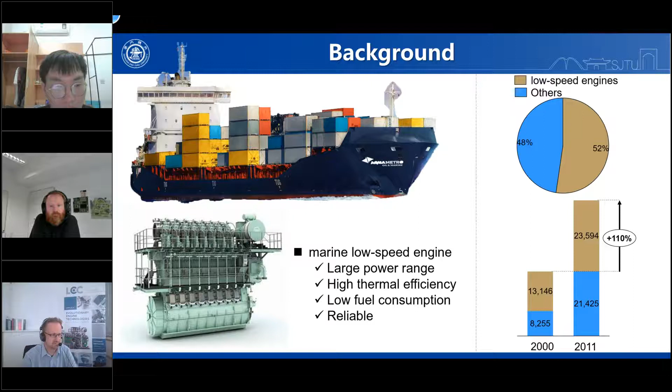As we all know, the two-stroke engine operation cycle consists of 4 periods, and among them, the scavenge process of the marine low-speed engine covers the entire stage from the opening of the scavenge port to the closing of the exhaust valve. During each stroke, the scavenge process not only cleans the combustion exhaust gas in the cylinder, but also provides fresh air for the combustion in the next cycle.

Simultaneously, the scavenge process must provide a certain initial vortex for the intake air. In the fuel injection stage, the appropriate strength of the cylinder vortex can promote uniform mixing of fresh air and fuel, and subsequently achieve efficient combustion of the mixture.

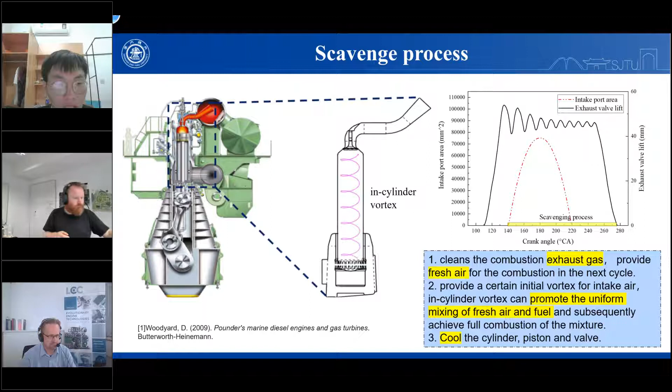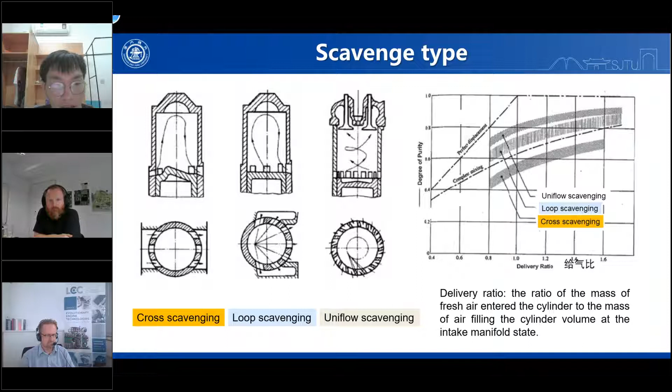Historically, there are 3 kinds of scavenge type: cross scavenge, loop scavenge, and uniflow scavenge. The biggest difference between the 3 types is the arrangement of the scavenge port and exhaust valve. The figure on the right shows a comparison of the scavenge efficiency for the 3 types of scavenge methods. As we can see, uniflow scavenge has the highest scavenge efficiency at all delivery ratios.

Besides, to meet the requirements of ship owners for low fuel consumption and IMO's regulation on greenhouse gas emissions of newly built ships, the ultra-long stroke low-speed engine has become a trend. With an ultra-long stroke, the combustion speed of low-quality fuel oil is low, and an ultra-long stroke cylinder can prolong the expansion process, improve the combustion process, and reduce the fuel consumption rate. The ultra-long stroke diesel engine can further create fuel savings of 3.5 to 7% based on the original fuel consumption.

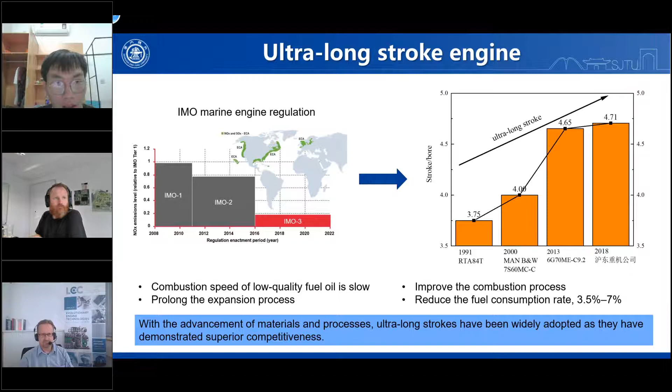In summary, the developed trend of 2-stroke engines is long stroke or ultra-long stroke as future developed trends, and uniflow scavenge will gradually replace cross scavenge and loop scavenge. The low speed engine will set the scavenge port angle to make the cylinder have a strong organized vortex flow and stabilize the macroflow of the gas.

But the cost of experiments for low-speed 2-stroke engines is daunting, and at the developing stage, extensive one-dimensional performance simulation is adopted to reduce the cost and accelerate development, especially in the area of digital manufacturing.

Furthermore, in the conceptual design stage of the engine, CFD calculation could not even be carried out due to the lack of specific geometry data.

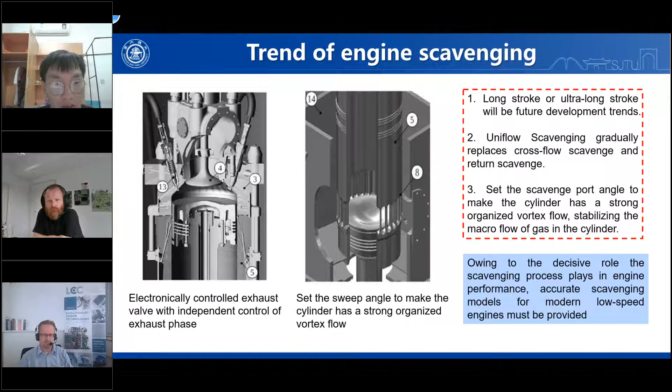Owing to the decisive role the scavenge process plays in engine performance, an accurate scavenge model for modern low-speed engines must be provided. There are 2 types of scavenge models for low-speed engines: the single-zone model and multi-zone model. There are also 3 types of single-zone model: the complete mixing model, the complete replacing model...

The complete replacing model assumes that the exhaust gas is completely replaced by fresh air, meaning the gas composition discharged from the exhaust valve is totally exhaust gas. The complete mixing model assumes that the exhaust gas is completely mixed with the fresh air. However, the scavenge efficiency calculated by both models has an error of 7% to 9% compared with actual results.

The heavy exhaust model assumes that the gas composition discharged from the exhaust valve is a mixing of exhaust gas and fresh air, so a coefficient is added to the equation.

In 1971, Wallace developed a new two-zone model. He divided the cylinder model into 2 zones: the mixed zone and the fresh air zone.

In 1991, Benson developed a scavenge model for cross scavenge. He divided the cylinder volume into 3 zones, adding a short circuit zone to Wallace's model. The short circuit zone means fresh air directly discharged from the exhaust valve once entering the cylinder, without mixing with the exhaust gas or pushing out residual exhaust gas.

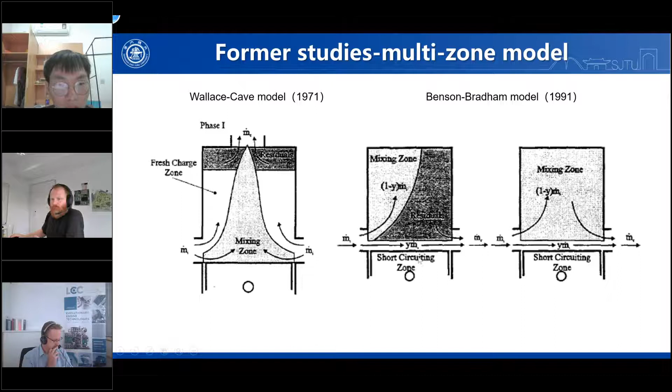But the figure shows that the 5 scavenge models compared with real data are not suitable for the modern engine scavenge process. As we can see, none of the models are suitable for ultra long stroke engines.

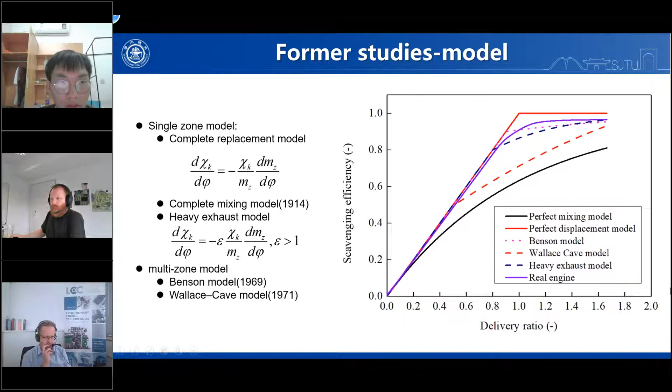So our goal is first to give a detailed discussion on scavenge performance, since existing models are based on traditional cylinder configurations, and no scavenge model is suitable for ultra long stroke engines. We want to propose a scavenge model suitable for modern low speed, long stroke, well-port uniflow scavenge engines.

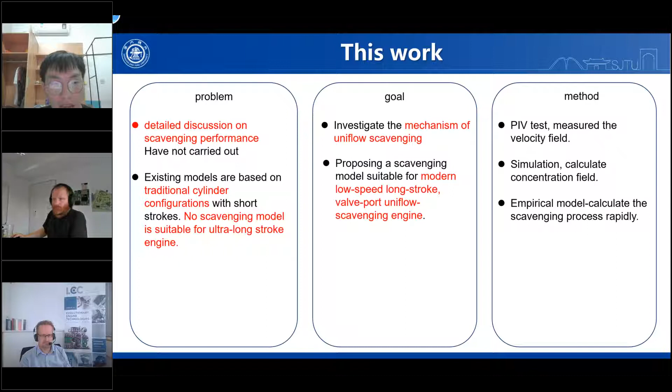We will first give an experimental method to investigate the velocity distribution at different cross sections. Second, a numerical method was used to elucidate the flow mechanism of the scavenge process, and the numerical model was validated by the experiment results. Thirdly, key assumptions are refined from the flow mechanism, based on which an empirical scavenge model is built.

Here we come to the experiment part. Our experiment is performed on this diesel engine, whose characteristics are listed in this table.

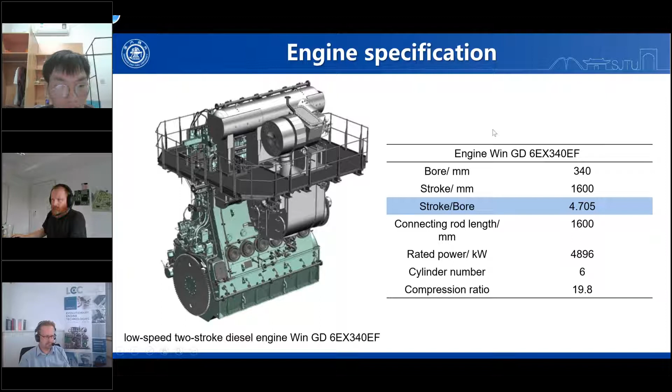The original engine cylinder size was selected for the test bench measurement section to ensure the degree of restoration of the original engine in the test. The scavenge pressure between the inlet and outlet was maintained at 3 kPa, which is the same as in the actual situation.

Vortices are composed of a smaller vortex core and an annular high-speed area. The velocity magnitude at the vortex core was lower than that in the annular area. Comparison of different axial sections shows that as the scavenge airflow moves downstream, the vortex energy began to gradually attenuate.

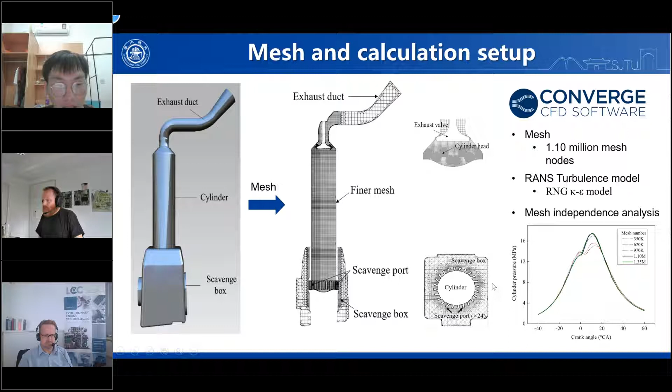The simulation mesh has been verified to be independent, as this figure shows, and the total number of mesh elements at bottom dead center is approximately 1.1 million.

To further verify the simulation model, the overall degree of scavenge non-uniformity calculated by test data and the simulation was compared.

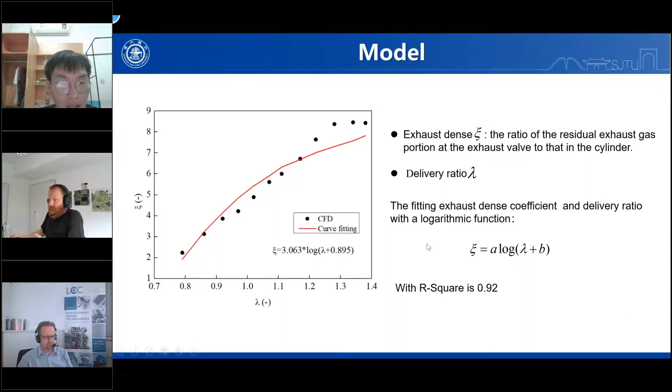As we mentioned, we divide the scavenge process into 3 periods. During the perfect displacement period, the gas composition discharged from the exhaust valve is total exhaust gas. So the scavenge efficiency is equal to the delivery ratio.

In the mixing scavenge period, the gas composition discharged from the exhaust valve is a mixing of the exhaust gas and fresh air. The exhaust density is calculated by this empirical relationship with the delivery ratio. And in the short circuiting process, the gas composition does not change anymore.

So we get this empirical model for the scavenge process.

Next we verify this model with 4 loads: they are 25%, 50%, 75%, and 100%. The discrepancy was maintained within 3%, and the maximum discrepancy occurs for the case with 25% load.

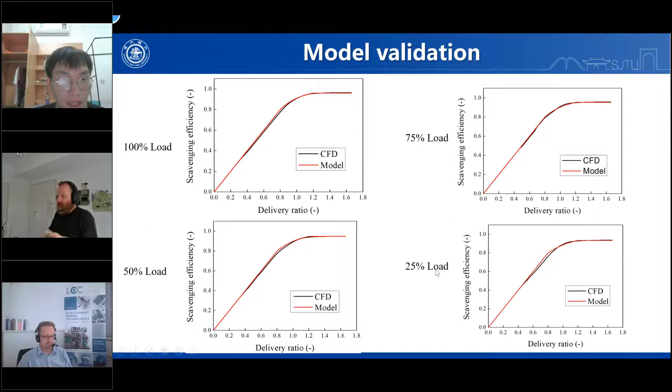And we also verify the model on engine performance.

When the Benson model is adopted, the discrepancy in engine power is up to 12%, which is intolerable. Meanwhile, the discrepancy of BSFC and indicated power, thermal efficiency and NOx had the same bad simulation effects.

In addition, the discrepancy will not be much better with the perfect mixing and perfect displacement and dense exhaust model.

However, with the model developed herein, the discrepancy in the engine power, BSFC, and the indicated thermal efficiency nearly disappeared, and the discrepancy of NOx stayed within an acceptable range.

In conclusion, the uniflow scavenge model of a low-speed engine is crucial for the calculation of low-speed diesel engine performance. However, the cylinder configuration of low-speed engines has profoundly changed the flow characteristics. Thus, the existing scavenge model cannot meet the requirement of high simulation accuracy.

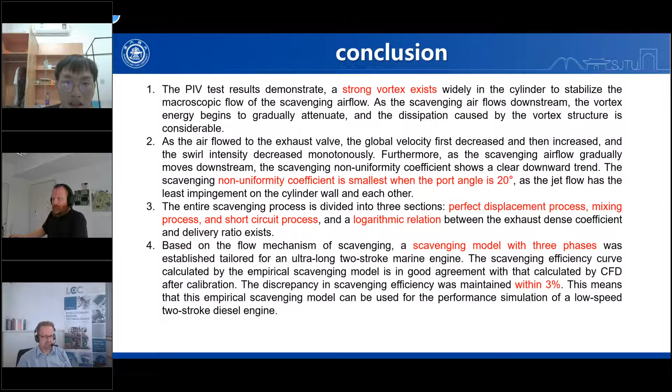We developed a scavenge model with 3 phases, and the discrepancy in scavenge efficiency was maintained within 3%. That's all. Thank you.

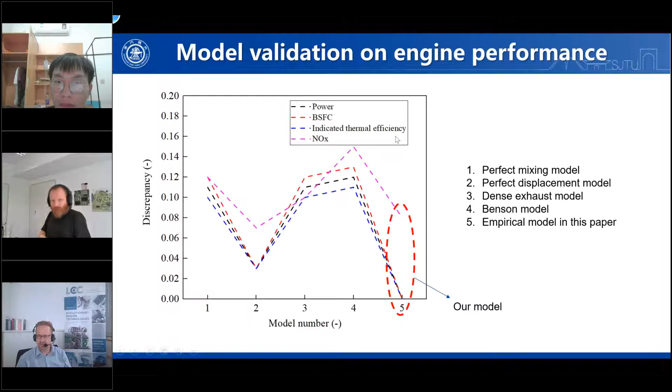In the meantime, while the audience write their questions, maybe I have one question about the measurement techniques. You did PIV investigations of the flow in the cylinder. Did you add any special tracer particles to the flow? And if yes, which tracer particles did you use?

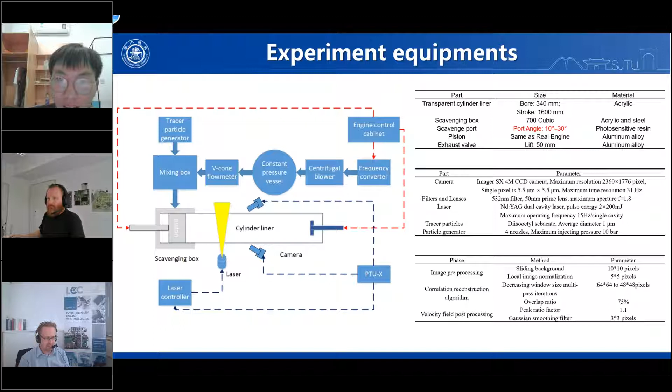So in order to do PIV, you need some particles that the camera then finds in the laser sheet. Have you added some? What particles? Was it graphite or oil or what? It is oil. Oil particles. Okay. Thank you.

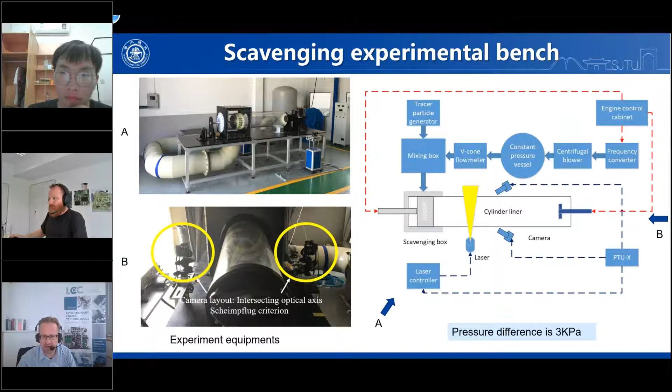In the meantime, we have a question from the audience. I can read it to you. The question is, could this model be applied in low pressure, low speed dual fuel engines to predict direct fuel slip during scavenging?

Low speed, low pressure, low speed dual fuel engine.

I think it is suitable for that model. It's possible. Okay, yes. So then can you predict a direct fuel slip during the scavenging process with this model?

It is only suitable for ultra long stroke, and it can be divided into three scavenge processes. So it is applicable also to ultra long stroke dual fuel engines.

I have here another question from the audience. The question is, do you see any limitations to applying this model to a bigger bore engine? A bigger bore, yeah. Do you see any limitations?

No, I think if the scavenge process is... I think it is suitable for it, not limited. There is no limitation for big bore engines because we can also do the simulation on that engine, but the low speed engine, the ultra long stroke, it is suitable for a large bore and a large stroke and bore ratio.

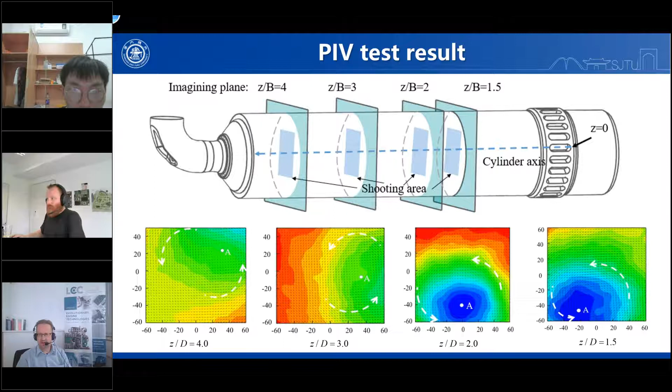So you also presented that you measure residual gas distribution. How did you do this with PIV? Wouldn't you rather use a spectroscopic method like laser-induced fluorescence to detect species distributions? Or how did this work with PIV?

The PIV is only for a velocity measurement. Exactly. And the species distribution? So, residuals.

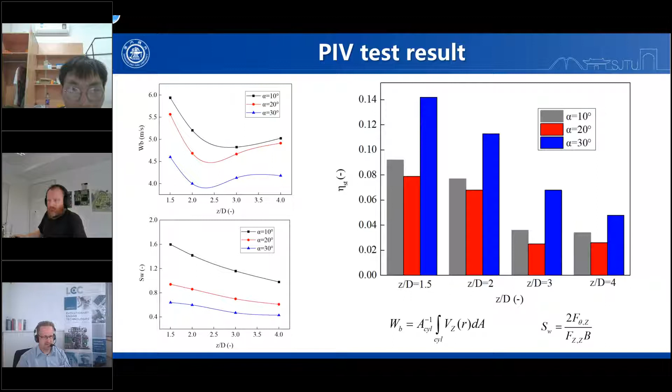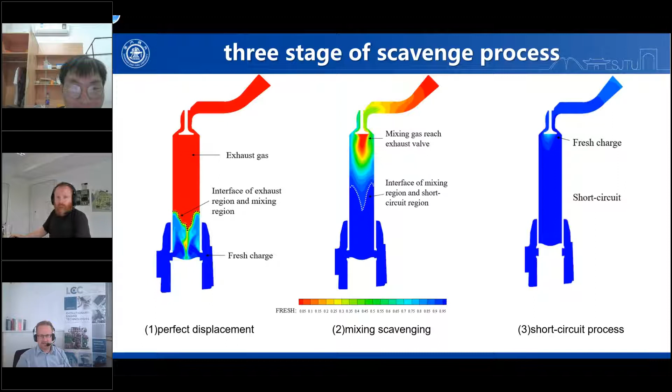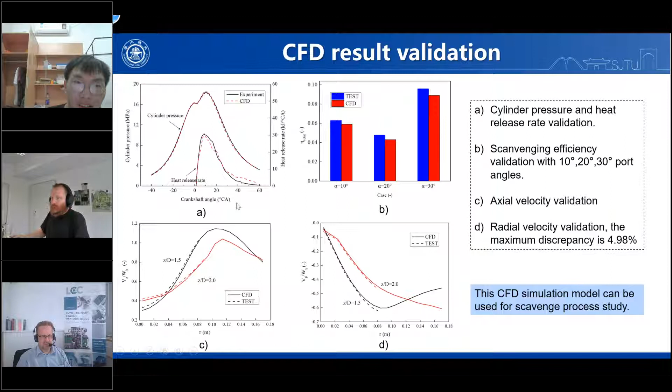I will just calibrate the model for the velocity profile. Okay. The PIV test is only to calculate the velocity result, and the model is suitable for calculating the scavenge efficiency. Okay, okay, I see.

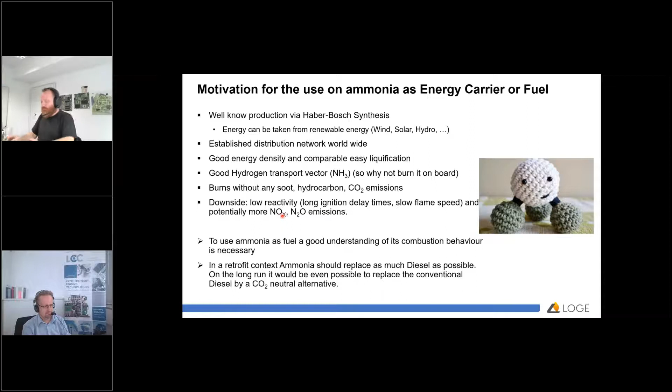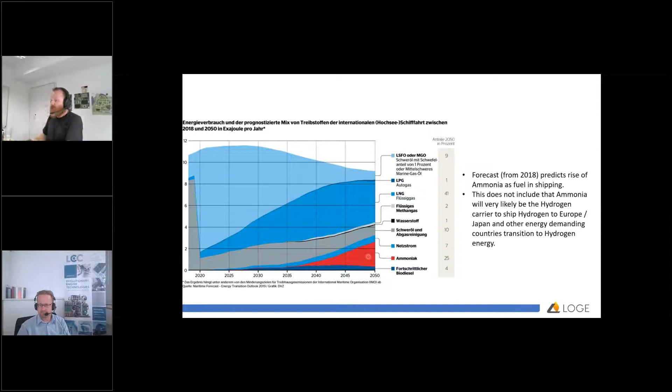Here is a slide from 2018, which tries to predict the use of different fuels in the future in shipping. This predicts that by 2040 to 2050, there will be a substantial amount, a quarter of ammonia used as fuel. This slide, of course, does not include that ammonia will very likely be a hydrogen carrier to ship hydrogen to Europe, Japan, or other energy demanding countries if we transition towards hydrogen energy.

The partners in detail: FVTR, based in Rostock, is a service provider for combustion engines, applied thermodynamics and process simulation. LOGE, which I'm representing here, is based in Cottbus in the east of Germany, south of Berlin, close to the Polish border. We are a software developer for fast, CPU efficient tools for combustion modeling, exhaust after-treatment, gas phase and surface kinetics, also coupled with other codes.

Then we have the University of Rostock, the chair from Professor Buchholz, the chair for piston machines and combustion engines. They carry out the experimental investigation at this diesel ammonia single cylinder engine, which is now already running in dual fuel engine mode.

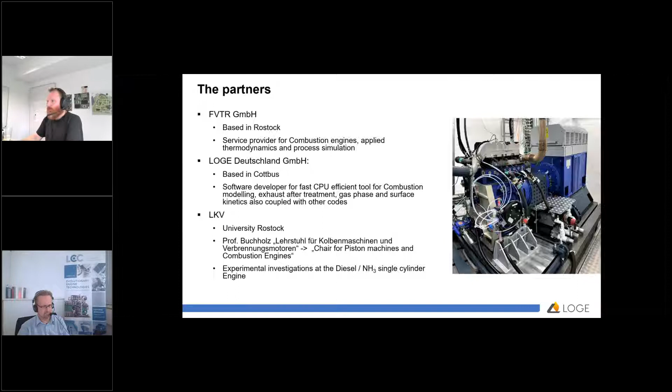The research structure, just to explain that a bit: we have our three partners. Of course, the experiments are an important key point, and they will provide us with measurements. That's here the LKV. We develop reaction kinetics and combustion simulation, which we can then pass back as modeling results and suggestions for operating points, and we use the measurements to improve our own model.

From the same measurements, we go to the FVTR. They provide us with thermodynamic boundary conditions and clean post-processed engine data. We give them our fast combustion model coupled with GT Power for dual fuels, which they can then use to run the whole full engine model, since we only take care of the closed cylinder.

And then we have a tool for dual fuel combustion analysis. We can do some design of experiments and probably run a few more interesting points, since with dual fuels and possible different injection profiles and such things, there's a lot of variables one can investigate.

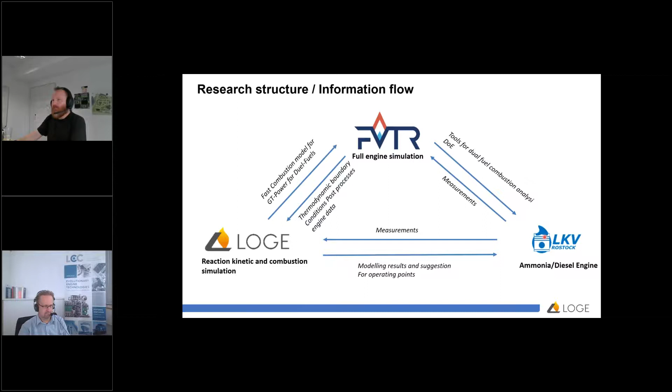So basically, our development goal is the prediction of the ideal engine operating mode for dual fuel. So we go in with detailed or tabulated reaction chemistry for diesel ammonia, which means it is a reaction scheme validated against ignition delay times, flame speed, emissions, and diesel ammonia interaction.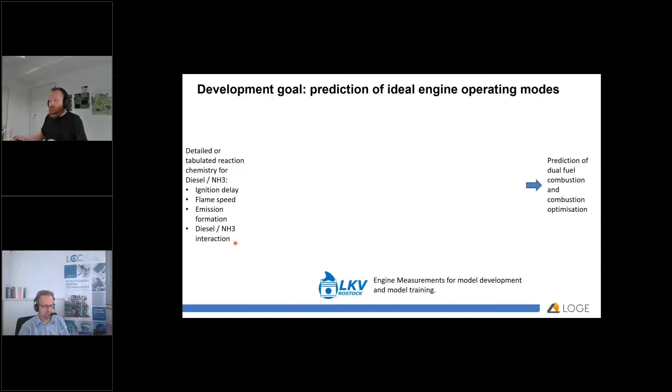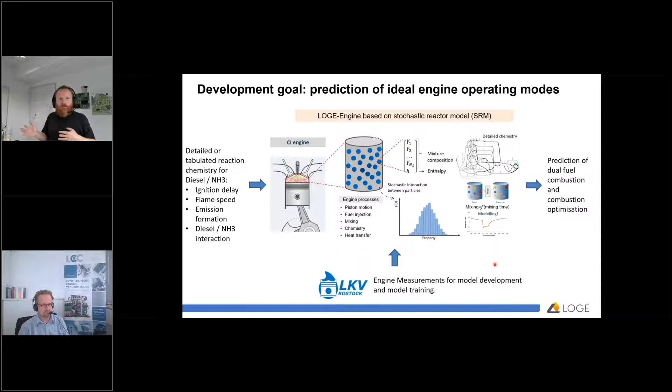We take the engine measurements for model development and model training, and we use our stochastic reactor model, which discretizes the cylinder, or the gas phase in the cylinder, into representative particles, and puts a probability density function on it. We get out the prediction of the dual fuel combustion, which we can then also use for combustion optimization, meaning we can shift fuel amounts, injection timings, fuel air ratios, and try to change the mixing time and such things.

I'll just make a very short slide on the reaction chemistry. Basically, we base the reaction chemistry on our LOGEfuel reaction schemes for diesel, and we updated the ammonia chemistry from recent publications. In our collaboration of LOGE and the University of Cottbus, we have been very successful also in scientific publications in the field of ammonia combustion.

This topic in the combustion community, in the modeling world, kicked off a few years ago, and we have been very fortunate that directly in that moment we also started with a lot of modeling and collaborations.

So the diesel we model as a 3-component fuel, meaning N-decane, 1-methylnaphthalene to represent the aromatic content, and methyl decanoate to represent the biodiesel fraction. We have a commercial EN 590 in Europe, and the engine is simply fueled with commercial diesel.

We have two ways to model the combustion: we can solve the chemistry directly, which gives us CPU times of minutes per cycle, or we can solve pre-tabulated chemistry, giving us CPU times of a few seconds to predict the combustion of the closed cycle.

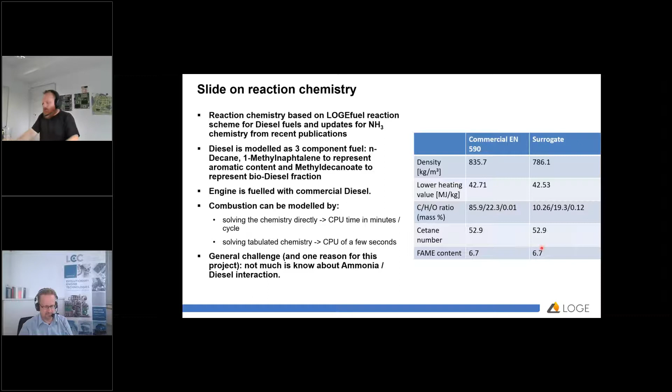Now, I would like to have shown experimental results. At this point, the first test bench data are available, up to 50% ammonia in mass, but they are not verified. The experiments should have been available by today, but supply chain issues mostly made it very difficult to set up the engine, so I decided not to show the experiments here because they're not verified. We'll simply go with some modeling results which show the idea of the tool we want to achieve, and they show the same trends as you would see in the experiment.

So we have that single cylinder engine with a bore of 110 millimeters and a stroke of 136 millimeters and a compression ratio of 16.4 to 1, which is substantially smaller than what we have seen in the previous talk. This modeling study is performed in 3 steps.

First, we train our combustion model against engine measurements for pure diesel. This is shown here on the right-hand side with some of the experimental points, and then with an optimization algorithm, we found the correct settings for a K-epsilon mixing time model.

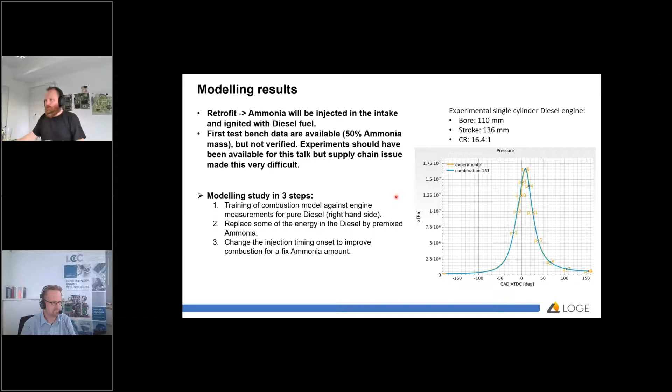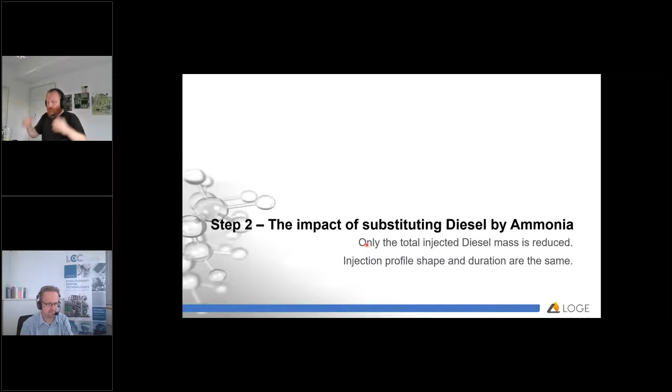Then we substitute diesel by ammonia, and we do that by reducing the total injected diesel mass, but we keep in this study the injection profile, shape, and duration the same. So it's only the total amount injected that goes down. Let's talk through these slides.

Let's take this 40% case, where we have seen that 80% is in this setting probably hopeless to get it to fully burn. Let's take the 40%, which burns somewhat but misses some of the combustion energy. Here, what I did in this study is I only moved the injection onset earlier, again keeping shape and duration the same for simplicity.

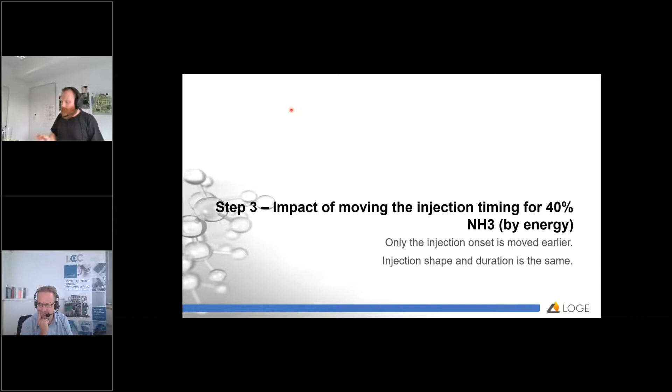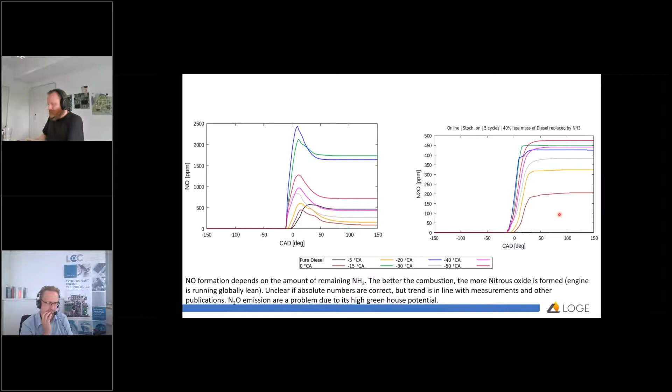I would like to come to my conclusions. Again, I would like to have shown more experiments, but I hope that we have them soon, and we are very confident that everything is consistent, and then we will publish them.

The conclusion here is that injection profiles, rate, shape, and timing are a key factor in burning premixed ammonia. Ammonia slip is an issue for larger ammonia amounts, as we see also in other publications and experiments. Burning small amounts of ammonia seems not to be a problem. We see a moderate rise of NO emissions, but it's probably mostly moderate because we still have ammonia present as a reducing agent. We see a significant rise of N2O emissions.

The next step in our research project is, of course, more dual fuel experiments. Then, based on this, looking again at the reaction chemistry and the combustion model to see if we need improvements, what we can improve, and then tune the model against that.

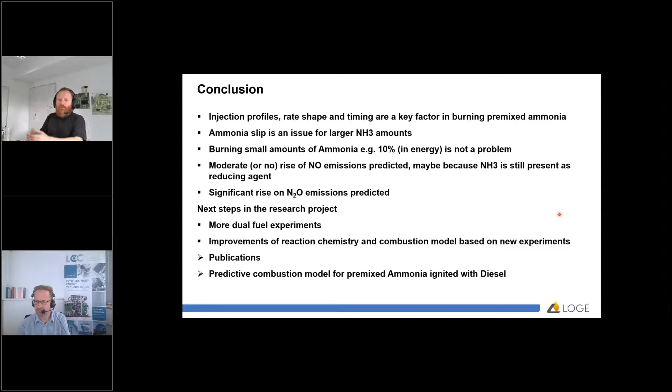Of course, we are going to publish this, hopefully in the context of CIMAC. The goal is still to have a predictive combustion model for premixed ammonia ignited with diesel, in the context that you have to train the model for pure diesel measurements first. So, I would like to thank you, and I'm very open for any questions.

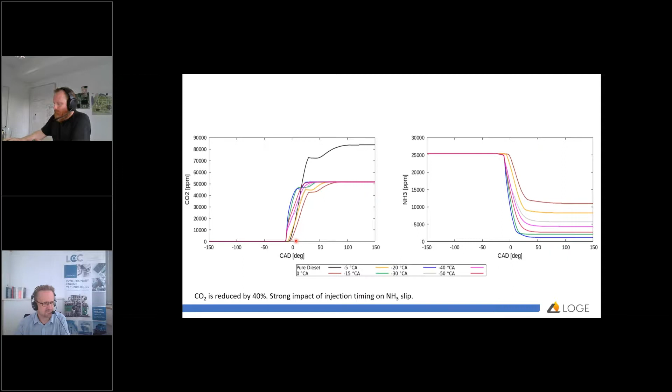Yeah, there are further questions. One is, why is the combustion efficiency decreasing by advancing the diesel injection timing? That refers to this plot here. Advancing means earlier - so we go earlier and earlier. And then, yeah, this is interesting. This is again just a model prediction.

My understanding of what I see here is that we reach a point where we inject - and we did that, we injected also at -100 - but we reach a point where we lean out due to turbulence. The diesel spray cone ignites, and as you go earlier, my explanation is it goes leaner and leaner, and you reach a point where you cannot even fully ignite the whole diesel portion anymore. Because we started with a lean engine case, and from that we took away 40% of the diesel mass. So the diesel part of the fuel is even leaner, and then you dilute that more and more by injecting earlier, and you may reach a point where it's even difficult to fully ignite that by compression - though again, without experiments to verify, this is just a model prediction and it could be incorrect.

Yeah, understood. There is a second question from the same person.

How is the effect of air-fuel ratio, compression ratio, swirl, and wall temperature in simulation and experiment? Oh, I cannot comment on that, we do not have enough experiments. So on swirl, this is somewhat replaced here in our K epsilon mixing model, so we see some impact. However, in the experiments, we do not have models yet where the swirl ratio was changed by putting something in the intake to have more tumble or something like that. So we are unfortunately not there yet.

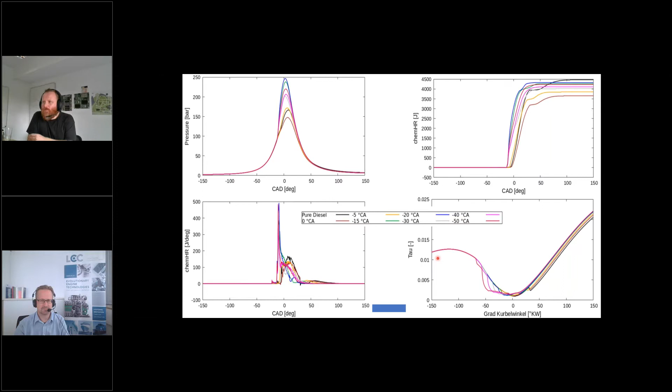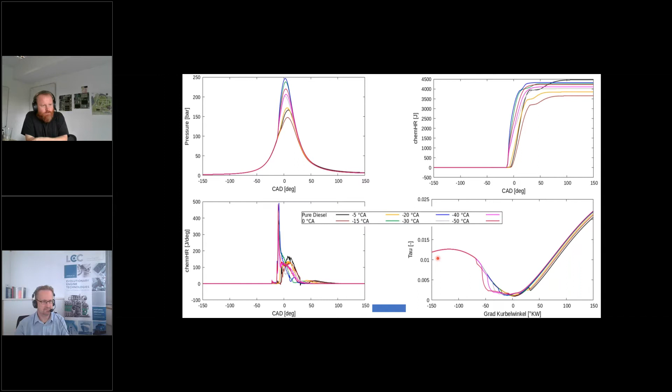I did not do any numerical investigations to see what is the dominant pathway under which conditions here. That's a bit more challenging in an engine simulation, but is a good point. One could do that in a publication later. But the different pathways here are included in the reaction chemistry.